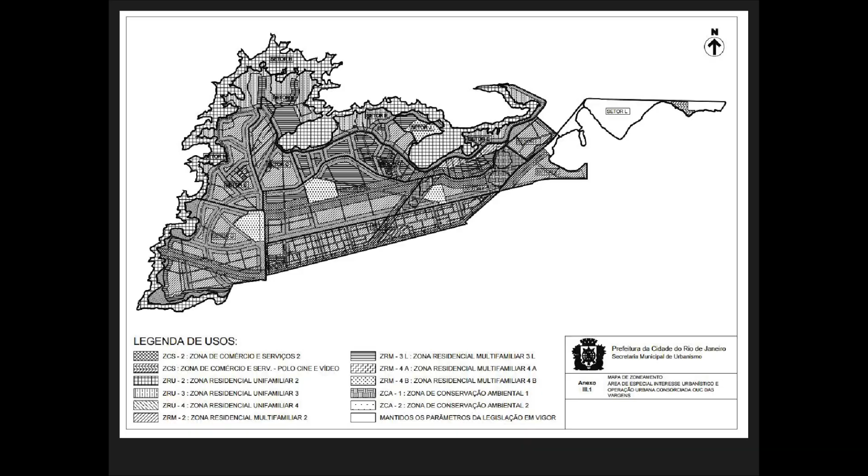But unfortunately, the zoning is downright Euclidean. It's very much this type is residential, this type commercial, and the urban design is essentially Le Corbusier all over again. And it's auto-oriented.

But where have existing regulations worked is what I wanted to find out. So this is the Orleans Plaza in the borough of Taquara. And in 2012, the city government designated the streets around this plaza a culinary pole, 'polo gastronômico' in Portuguese.

The city recognized the success of food businesses in the area and sought to encourage their development, but the designation only includes two tangible urban planning strategies. First is, quote, 'free traffic flow of vehicles and pedestrians,' which the government did a bit of by preventing sidewalk parking and building raised crosswalks, and second, installing signage identifying the neighborhood as a dining destination.

But the law today, and this is just an excerpt that I translated, does little to protect what actually makes these streets so great, which are active, permeable street frontages that engender lively public spaces.

Notice, for instance, in the regulations that buildings detached from lot boundaries can have a higher number of stories than buildings that go to the side. On the one hand, that's a good thing, that we're measuring them in terms of stories rather than just meters, for instance—that's typical of modern form-based codes. But it can also create a mini tower-in-the-park type of environment along a street front.

Often these requirements have formal implications even if they're not explicit. So if you look at 3B about non-residential land uses, it states non-residential land uses can only have independent access from other uses. That has implications, say, for the design of live-work units.

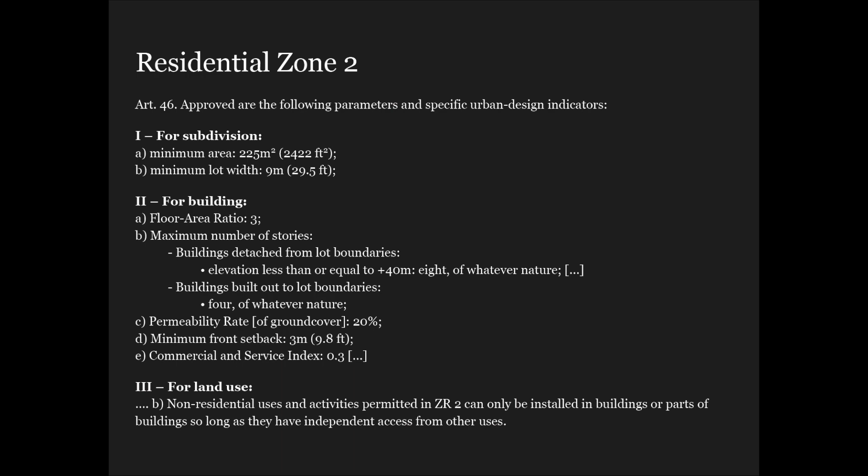But narrow buildings like the ones I showed in downtown are essentially illegal. So one historic sobrado, or urban multi-story house, is about 4 meters or 12 feet wide, but the regulations require 9 meters, almost 30 feet of width along the street front. So I modeled three scenarios of what could happen to that street frontage on the picture I showed you under current zoning regulations.

So the top is the urban fabric today. The middle is what would happen if a developer essentially bought two parcels at a time and built up as much as they could. And the bottom is the absolutely disastrous result of what could be built if a developer managed to get hold of all the land on that block.

The middle one has the potential to be acceptable if the developers actively choose to include ground floor commercial uses. But again, that's not a guarantee, and that has to be a deliberate choice on the part of the developer. So the code does not guarantee that this street will remain commercial, despite the city government trying to encourage activity there.

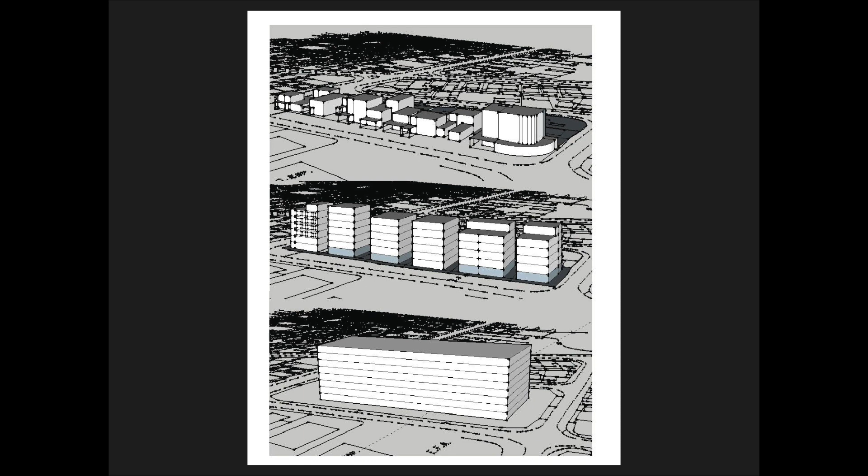So what kinds of regulatory directions can we take in cities like Rio and other Brazilian cities to make walkable and engaging streets a guarantee rather than a happy accident? Form-based coding offers some good techniques, but it has to go beyond building form standards and indeed encompass the kind of visioning process that we've grown accustomed to with form-based coding in the United States.

Now, there is some precedent for form-based zoning in Brazil, dating all the way back to an imperial decree. Yes, Brazil used to be an empire from 1822, and essentially, as they say in the CNU small developer sessions, form follows finance. So here you got a tax break for generating specific built forms.

And even if we look at the original map of the Orleans Plaza, that commercial culinary district I showed, even though it's quite faded, here at the bottom we see some indications for graphic development regulations giving ideas of how the people who platted this neighborhood wanted to see residential and commercial setbacks from the street.

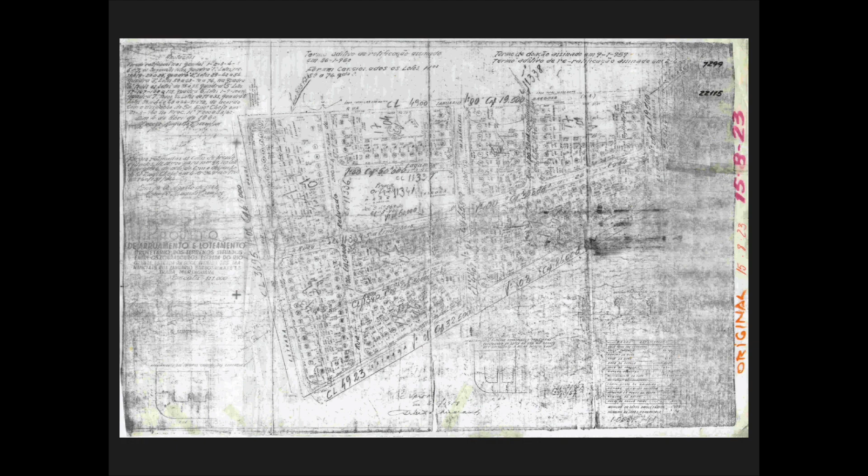And as another illustration of these happy accidents that happen in Brazilian neighborhoods, all those commercial streets along the plaza were actually originally intended to be residential. And larger lots that were supposed to be commercial wound up being residential ones.

Other contemporary maps from the 1930s are really remarkably relevant in providing examples for how we can generate these older patterns of street frontages again, such as by limiting the height of garden walls so that we don't get these hallways of blank walls throughout the city.

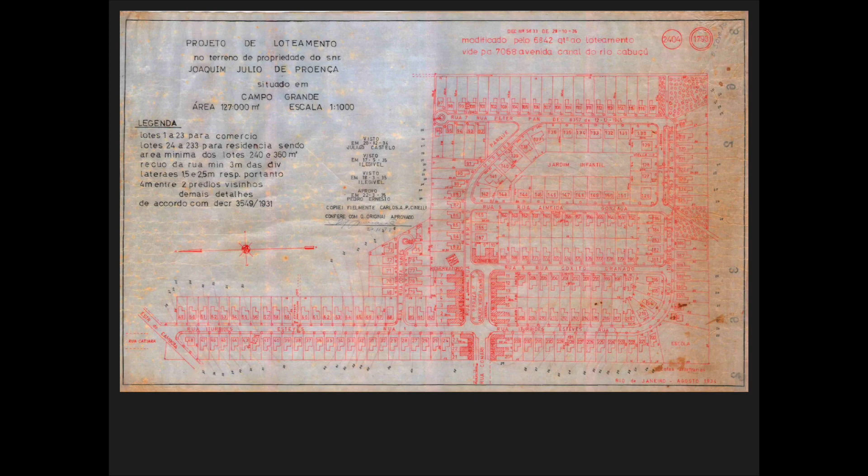This 1930s neighborhood is actually almost intact today, and the map suggests almost a quality of a regulating plan with form-based coding. But unfortunately, the regulations nowadays didn't prevent a great historic neighborhood like this from being maimed by large setbacks and large blank walls and the demolition of one of the original buildings.

Indeed, one of the remarkable aspects of Rio de Janeiro's urban history is that every legally approved change to the physical city approved by the city government from 1902 onward is documented and freely available from the city government on these online maps.

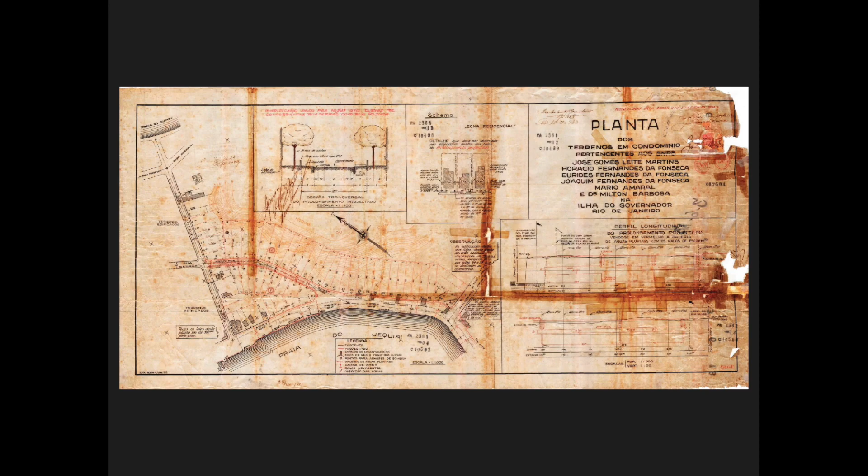And one of the great features of these maps are these graphic regulations. So on the top, for instance, you see if you have the challenge of a narrow street, one solution for arborization on that street is, rather than expecting trees on the public right-of-way, to expect them in shallow front yard setbacks. Notice also there's an illustration limiting garden walls to just essentially waist height rather than 1.5 humans. And this is another example of that.

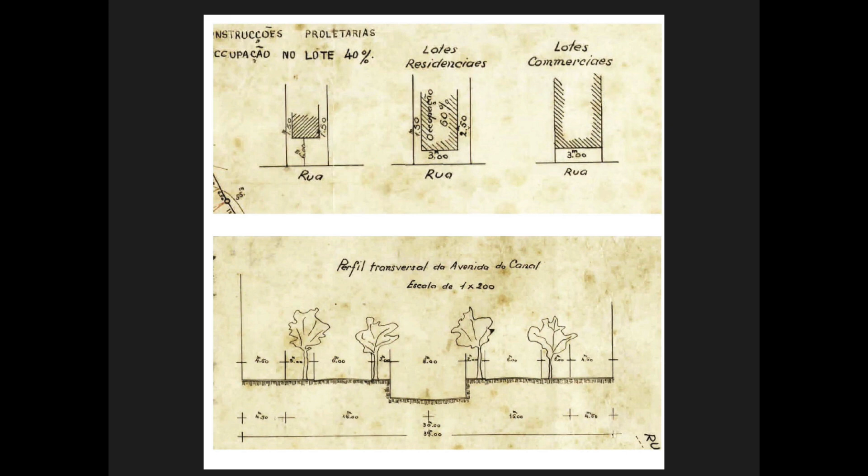And Brazil is in a happy position to have these kinds of precedents for form-based zoning, or zoning based on built form, so that form-based zoning for new projects doesn't necessarily feel like an international import. And like we've been saying, there are plenty of notable Latin American examples.

So in short, by focusing on how buildings meet the street and generate lively public sidewalks and public spaces, form-based coding can offer a solution to undo the deadening effects of isolated towers and high-rise sprawl in newer neighborhoods, as well as their deadly forays into the wonderful older neighborhoods of Brazilian cities.